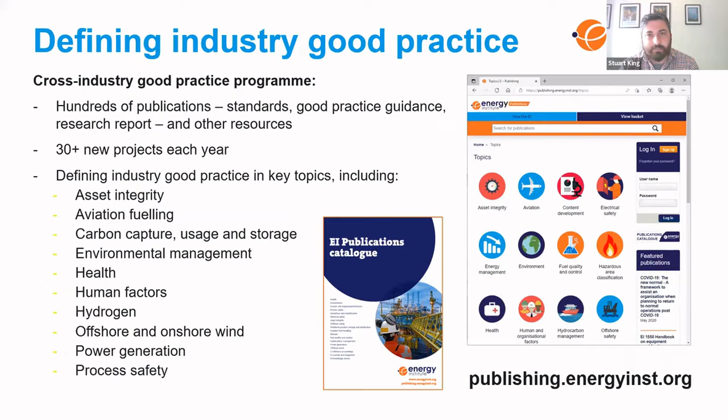So I'd like to introduce today's speakers. We've got 4 speakers lined up. Our first speaker is Nick Hough, a technical advisor for the International Marine Contractors Association. Amongst other things, Nick supports the IMCA Health, Safety, Security and Environment Committee and is responsible for all IMCA safety flashes and safety statistics. Nick is also responsible for supporting the development of safety promotional material and guidance.

Our second speaker is Utibe Akpanudo from Shell. Utibe is a lifting and hoisting subject matter expert with 18 years experience in lifting and hoisting operations in the oil and gas industry, including offshore and onshore, and is also a certified mobile crane and forklift truck operator.

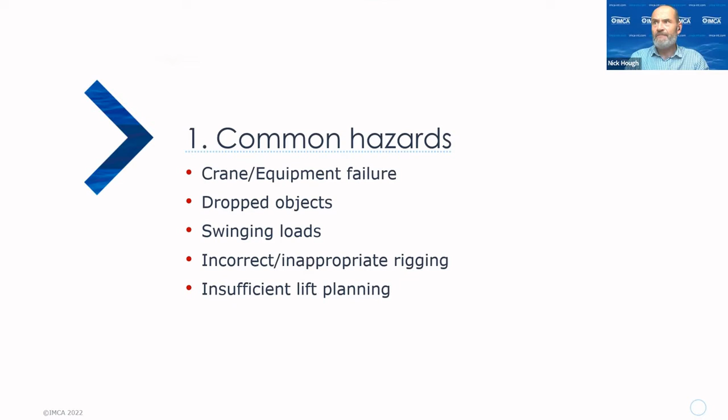Some common hazards then of lifting in the offshore context. When I looked into this, what I found is that it's quite a nuanced and blurred list, that's what I'll come back to a number of times. Just a minute while I set this stopwatch going so I know where I'm going. They all blur into one. So rather like the IOGP life-saving rules, any crane incident might be a crane equipment failure, it might be dropped objects, swinging loads might come about because of insufficient lift planning. There's a kind of blurring of what's going on that will come up again and again.

Let's look firstly then at equipment failure. Electrical faults are quite common there. When a crane's in constant use, it's inevitable that certain components are going to fail. Some of those failures might be sticking contacts, some might be earth faults, some might be electronic component failure as well. We had a safety flash about a year and a half ago from the HSE, where there was a fire in an electrical cabinet, and the problem there was that the contacts hadn't been properly and appropriately lubricated, and there was a fire. So sticking contacts could be an issue. Corrosion, I find certainly as one who collects safety flashes, is certainly an issue, especially in difficult to reach places.

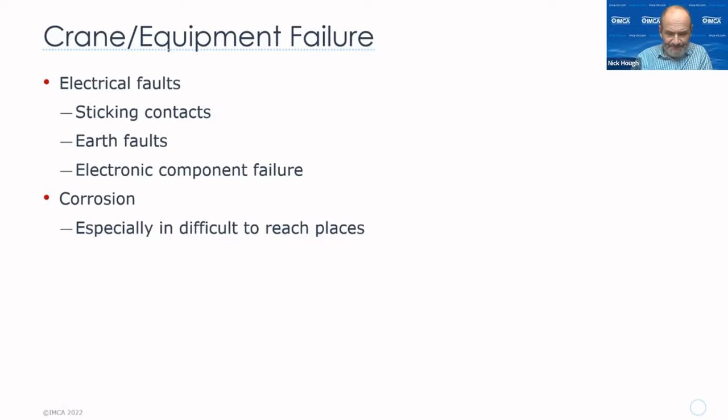If we look at dropped objects, Mark has provided for me an excellent list, 10 there, you can read them, 10 different causes of dropped objects in the context of cranes. And when I look through them, it's quite interesting. With almost all of them, there's perhaps only one or two exceptions, nearly all of them come down to human factors: inadequate risk assessment, failure perhaps to identify dropped object hazards, human factors, operator error, poor behavior, complacency or neglect, inadequate procedures, bad planning, poor housekeeping, neglected or homemade tools. All these things, with one or two only exceptions, they all come down to human factors. The HSSE Core Committee is looking very closely at a possible seminar in early 2023, and human factors and human performance will be one of the primary topics we look at.

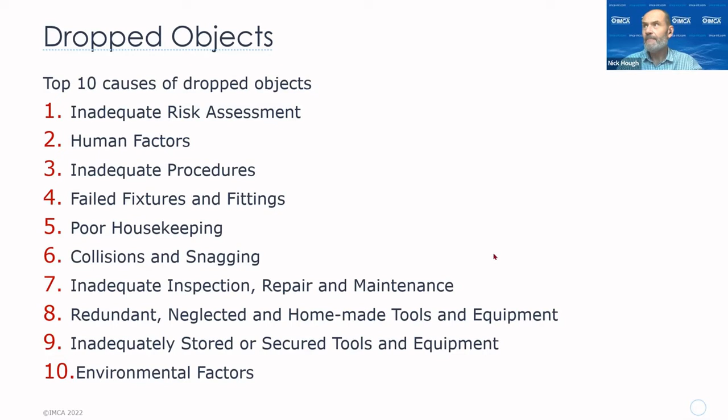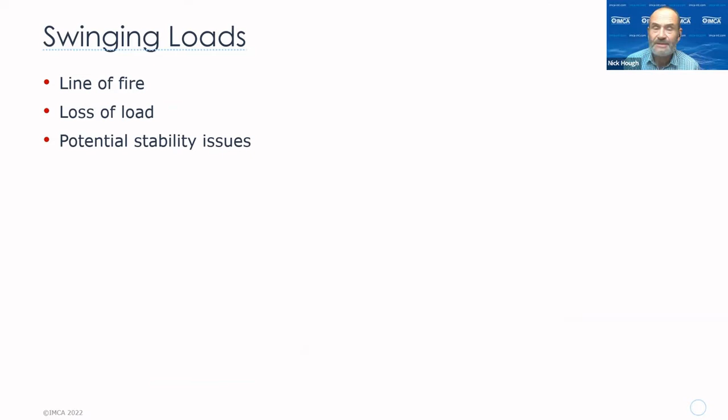If we drill down further, then swinging load. Now, swinging loads are dramatic, of course, but as we'll see later in the slide pack, not quite as common, although the consequences are quite outstanding, not quite as common as some of the other causes that we'll highlight today.

Even in calm seas, there'll always be some small or unsolicited movement of a suspended object. So in marginal conditions, you could easily get into a situation where objects start swinging in and out of control, and I think we've all seen it.

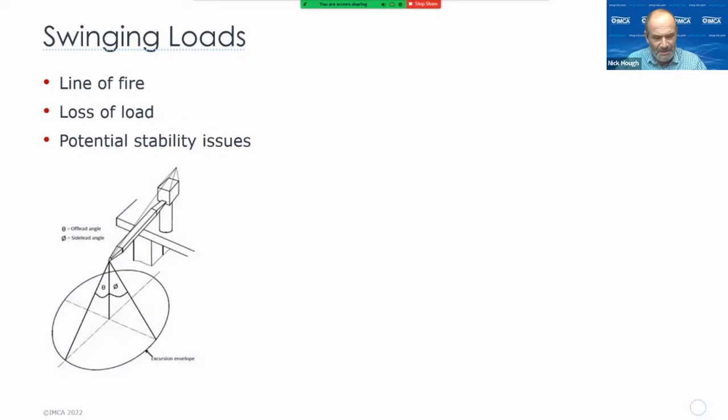Additionally, as you can see from the diagram at bottom left, you can get into a scenario where there'll be forces on the crane jib and on the crane, which it is not entirely designed for. Perhaps there'll be sidelead and also offlead.

But let's look at this. This is, if I can just play this. You have to decide when are you going to start running.

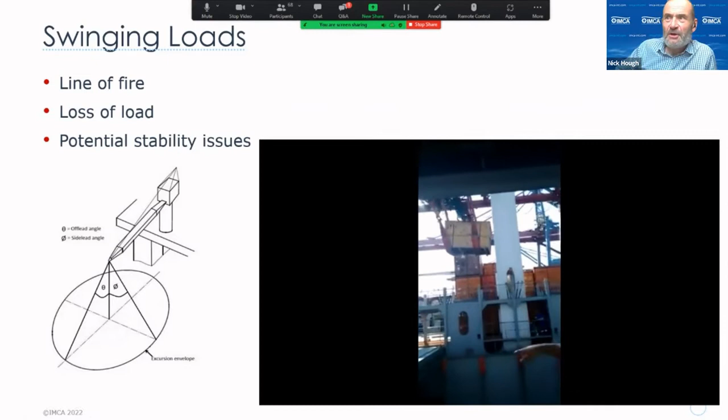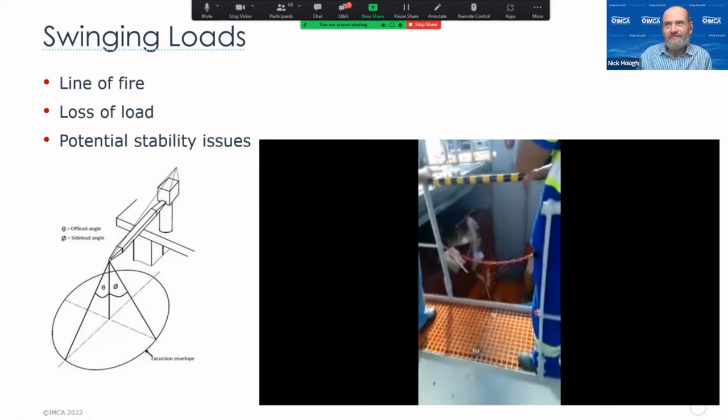I think that's all we need to see there.

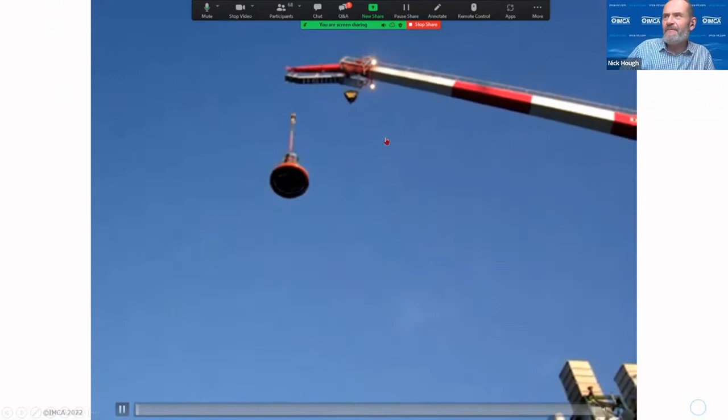The next video that's been provided from Mark's comment as well. I wouldn't like to see that happen.

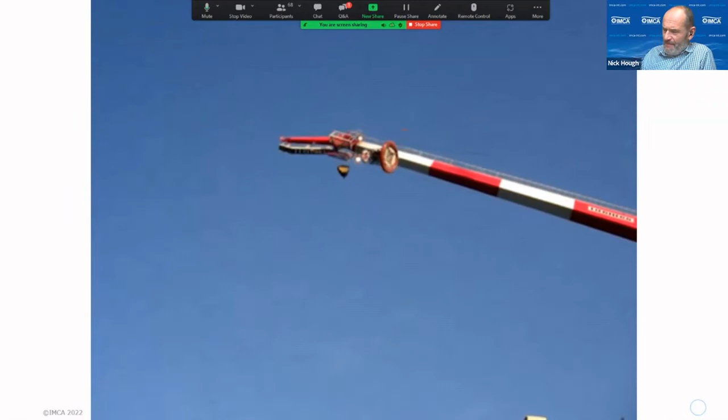While we're playing this video, moving loads in motion here and what have you. It depends on the weight of the load and the length or height of the crane jib. There can be some accidental loss of the crane hook, the crane hook failing, leading to a big heaving moment, and you can get a scenario where the load moves all of a sudden.

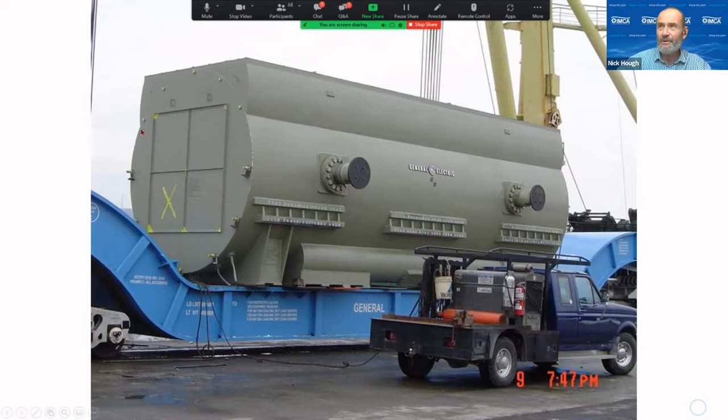We'll highlight that. Here's a generator, well, I think it's a generator, a large object about to be lifted onto a vessel. We get it rigged up, we pick it up, and we lift it across. No further comment needed, perhaps.

What about incorrect or inappropriate rigging? In order to lift the load properly, we need to know the weight of the load. That's the rigger's responsibility. The crane team really do need to have an absolute understanding. Most equipment that's regularly lifted may have the weight stamped on, but sometimes not.

There needs to be very regular, very thorough, and very frequent inspection of equipment. That's something we pick up in safety flashes and something we'll mention in a couple of slides' time.

The other scenario that can crop up, and I've certainly seen that when I've been offshore, is that the slings or the lifting equipment no longer have the appropriate labeling or tagging on. Such equipment ought not to be used.

Another thing I've certainly seen in safety flashes is homemade kit and inappropriately fabricated devices that have been modified in one way or another. That's not really on either.

Also, not using the correct sling device or hitch. Sling protection, we'll see that in a minute or two, where the sling hasn't been properly protected. And then there's the failure to understand the integrity of the load. That can also cause a number of problems.

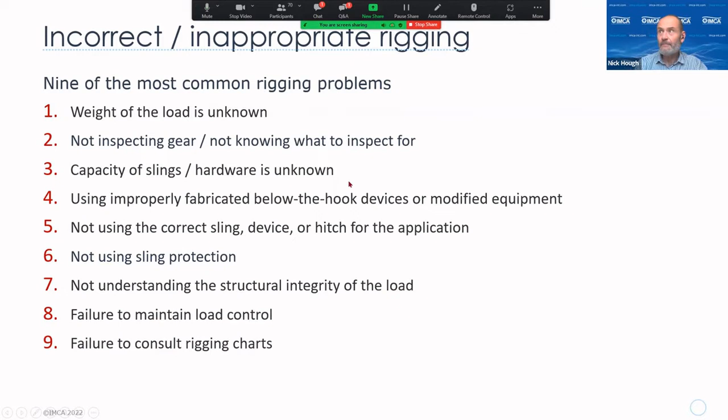Insufficient lift planning, categorization and considerations. There's a wide range of lift operations, inshore, offshore, subsea, and to say that they're all routine or all non-routine doesn't always work. What might be routine for one company because they do it all the time will be non-routine for another, involving extra and additional planning. So it's vital that we have appropriate categorization, and there needs to be an appropriate risk assessment made. Sometimes it needs to be specific and detailed, and sometimes a generic plan will work.

As regards lift plan considerations, all lifts are exposed to various dynamic effects due to differences in hoisting or lowering speed, crane or vessel motions, and load motions, and all that needs to be taken into account.

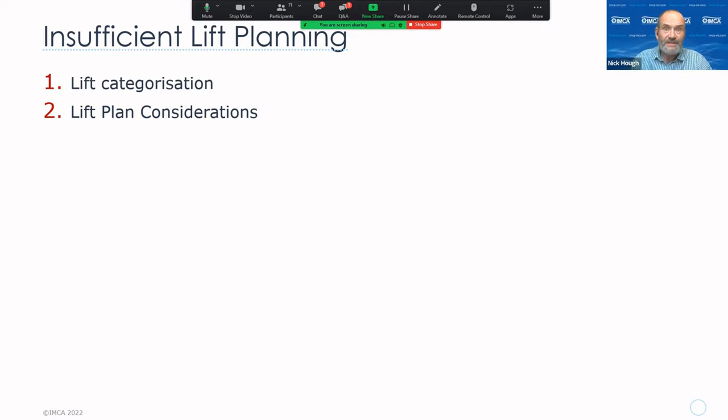Are we lifting from the shore to the vessel? Are we lifting from the vessel to the shore? Are we lifting inside a vessel? Are we lifting in different seas? Are we lifting from a platform to a vessel or a vessel to a platform? All of that needs to be taken into account.

It's been suggested that we look at a handful of real incidents, and that's what we'll do now for the next couple of minutes.

When I looked through all this, I'd selected something like 400 or 500 different safety flashes, all involving lifting. On a search of words, crane equipment failure formed around half of all the incidents I saw. Dropped objects, something like 40%, and swinging loads, just one or two. Incorrect or inappropriate rigging, around 5%, and about 10% was insufficient lift planning. But these all blur into one. One can lead to the other.

Let's look at 5 flashes in slightly more detail in turn.

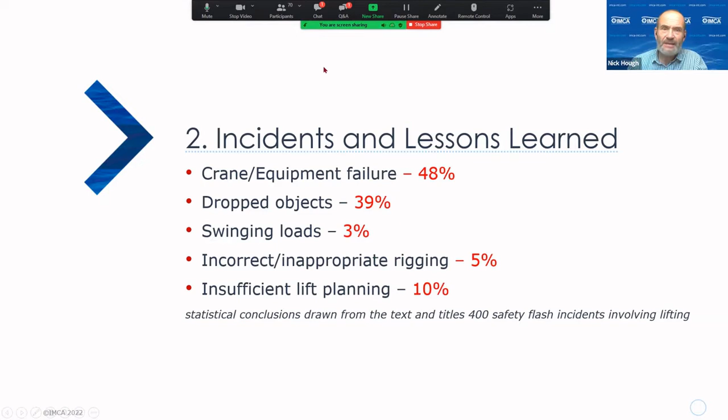Here we see a sling failed. 8 tons of ROV and tether management system fell 30 centimeters, bending the ROV quite badly. The whole 8 tons was directly slung onto the crane hook with a 10-ton fiber sling choked around the main lifting eye. The sling failed, choked around a sharp edge with no protection, and failed suddenly and completely. What were the actions taken? Better lift planning, better supervision, no improvised solutions, and better protection of any edges - not just sharp edges, but corners as well.

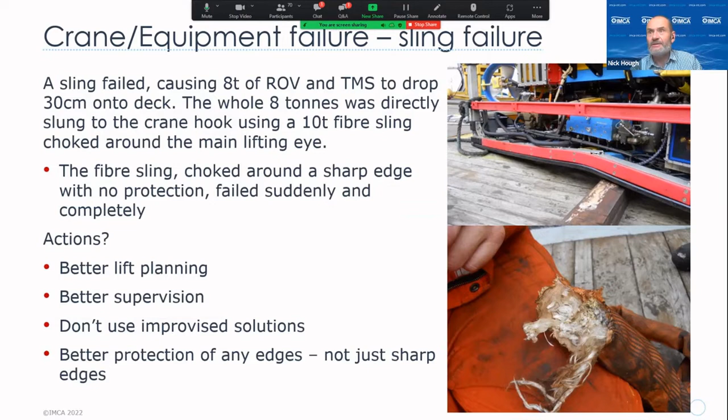This one is slightly more recent. A 9-kilogram item fell 15 meters from a pipelay tower - certainly would have been a fatality if it hit anybody. Parts were being changed out and put into baskets to be lowered out. One such basket started swaying, hit the crane, and a part fell out. The task was considered routine, so complacency may have played a part, along with sea conditions and darkness.

Perhaps it could have been better illuminated. Risk assessments were found to be inadequate, and the lock on the basket gate was also found to be inadequate. What were the lessons learned? They found that had they slewed the crane differently, it might have avoided the basket striking the crane. Covers and nets fitted on the basket might have helped. Also: thorough checks of all lifting appliances, don't overload, and better communication.

This is something I see again and again in safety flashes, and we'll see it in the next slide too - better communication, in this case between the crane operator and the banksman.

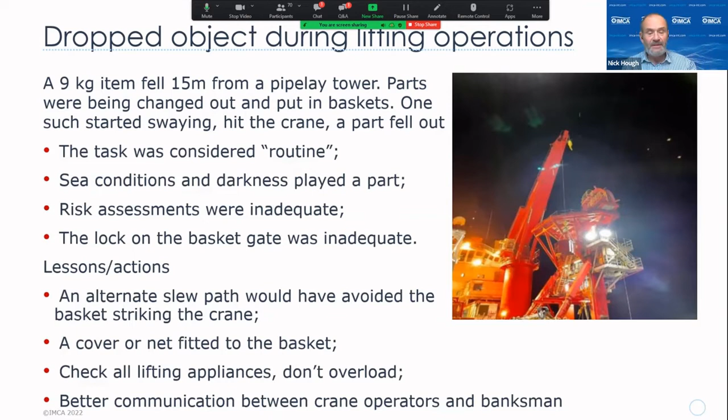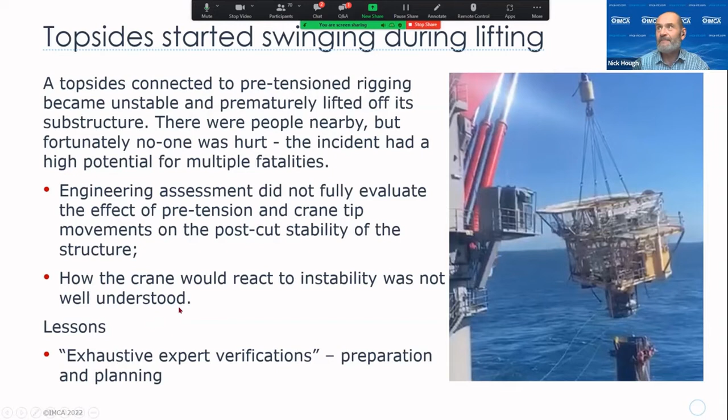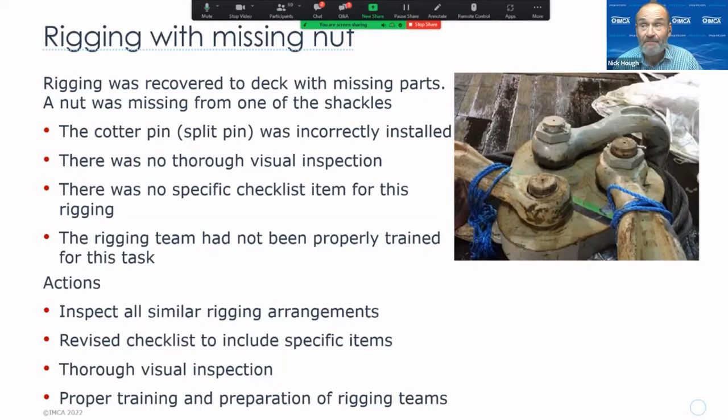Rigging not appropriate - here we saw rigging being recovered to deck with missing parts. A nut was missing from one of the shackles, the cotter pin was incorrectly installed, there was no thorough visual inspection, no specific checklist for that rigging, and the rigging team hadn't been properly trained. The actions taken were thorough and frequent inspection of all similar arrangements, a revised checklist to include specific items and thorough visual inspection, and proper training and preparation of the rigging team to ensure they're familiar with the material they're handling.

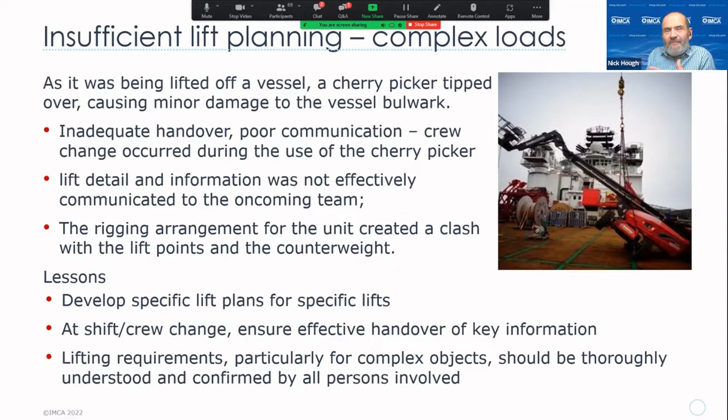The lessons there: specific lift plans for specific lifts, ensuring effective handover of key information at shift change, and the requirement that particularly for complex loads, everyone should understand what's going on.

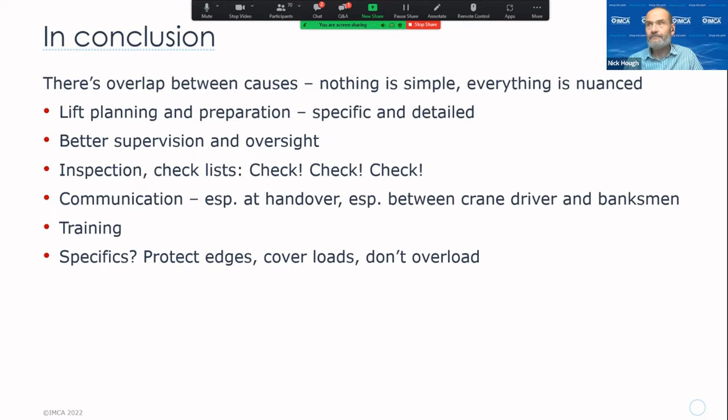And that, I think, ladies and gentlemen, will be it. So thank you very much.

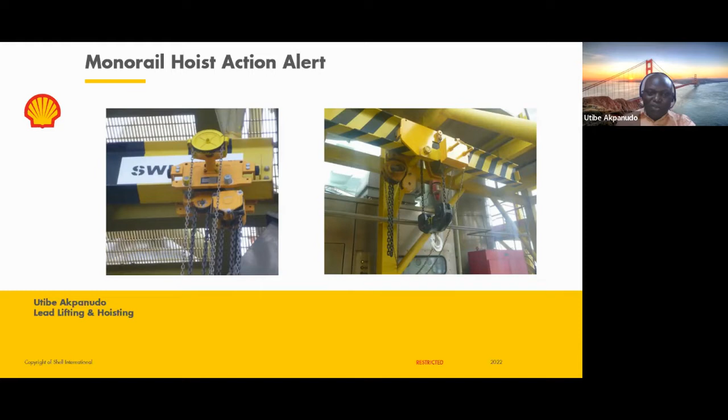So this is about the monorail hoist action alert, looking at a couple of learnings we had in Shell operations, which allowed us to put some mitigations in place to ensure that those incidents do not happen again. So the agenda for this discussion is going to look at introductions and the incident summary, and then action, and then an opportunity for questions and answers.

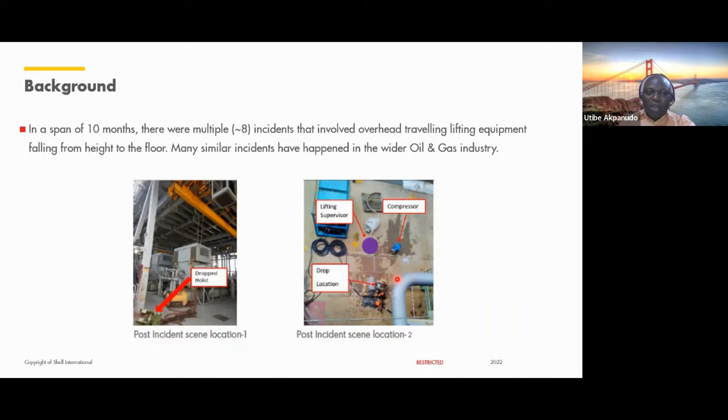So I'll go to my next slide to probably look at a typical scenario illustration of this monorail, and probably the end stops, which is one of the key discussion and learning points in this webinar.

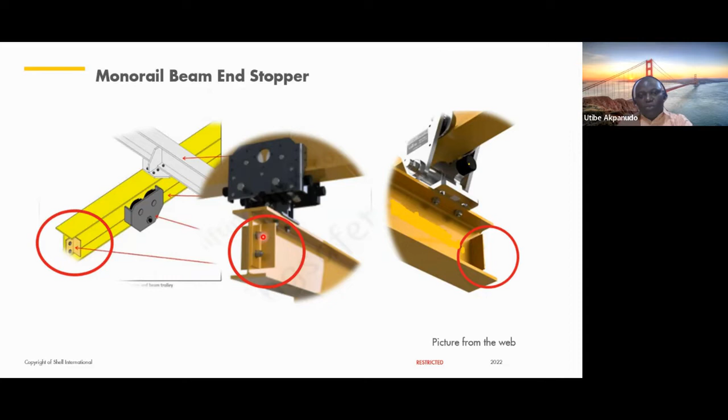So I'll go next to the other presentation for us to look at why it happened. Below are some of the causes we identified in the various incidents, and there were some common causes across the incidents. As I showed, not every cause was present in every of the incidents.

As I begin to look at the common causes, one of them was inadequate size end stopper on the monorail beam to prevent the trolley hoist from dislodging from the monorail beam. These were found in 4 of the 8 incidents, which represents about 50% of the incidents that happened within that span of 10 months.

We also noticed variations, absent or unsuitable pre-use inspection after installation of the lifting equipment at height, which in some cases posed a lot of challenge for folks out there, guys at the front line, accessing the height where they need to inspect this lifting equipment before use.

We also observed that there was quite a competence issue with the operator of this monorail and overhead traveling equipment. Competence in the sense that, irrespective of any piece of equipment, one is expected to undergo some competence training, to be able to understand the safety impact and HSE exposure of every equipment. So that was a gap that was noticed as well.

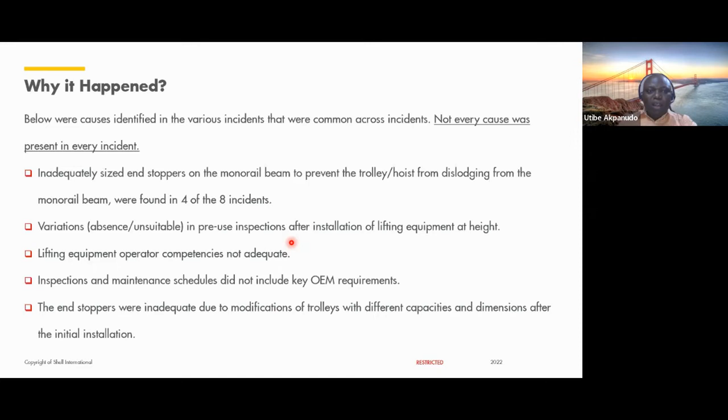Lifting equipment should be installed correctly according to the design and for its intended purpose. Every lifting equipment has a specific purpose it's been designed for. So installing it has to follow that design philosophy to be sure it's being maintained, operated, and stored in a safe manner.

Lesson learned also includes the pre-use inspection, which has to incorporate a functional test and a dry run. This is without load, and should be performed before every monorail, hoist, and trolley is used. What do we mean by this? Before you actually rig a load on the hook of the hoist, whether it's a manually operated or power-operated hoist, the operator needs to undergo a pre-use check: hoist it up, travel along the path, travel along the beam, check that everything is fine, and check all the load securing is in good condition before the operation can commence.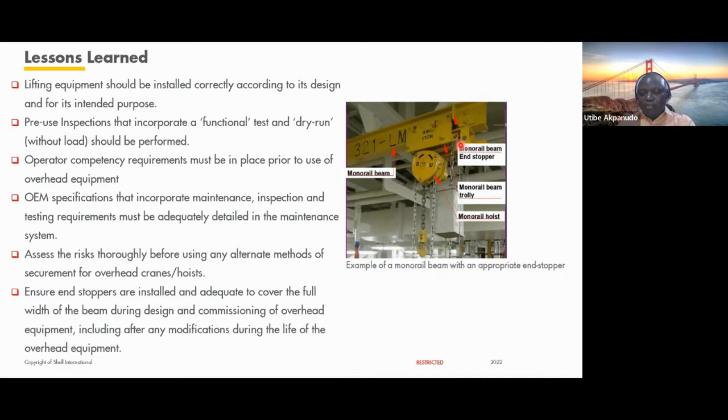Then some actions which can also be a best practice for the community and different assets to use. What we did was ensure that design and commissioning requirements are outlined in our lifting and hoisting guide. In a local procedure, you have to be sure this specification is indicated there as a control, that the end stop has to cover the full width. This is one of the best practices we implemented, which can help other communities ensure this by design. We don't give any room for error.

Then the second action was to identify and address existing overhead equipment. What we have to do is inspect the existing overhead lifting equipment, identify those where the stopper does not cover the full width of the beam. You can put it down in a register, then undergo a formal process to ensure a redesign of the end stopper is done to cover the full width of the beam.

We also, as an action, confirm that overhead equipment has sufficient and appropriate securement to prevent the lifting equipment from falling. The securement there is the whole traveling hoist system. You have to do a sweep and be sure it has been secured to the beam or structure keeping it in position, and that structure is robust enough to withstand the impact of the hoist and the load.

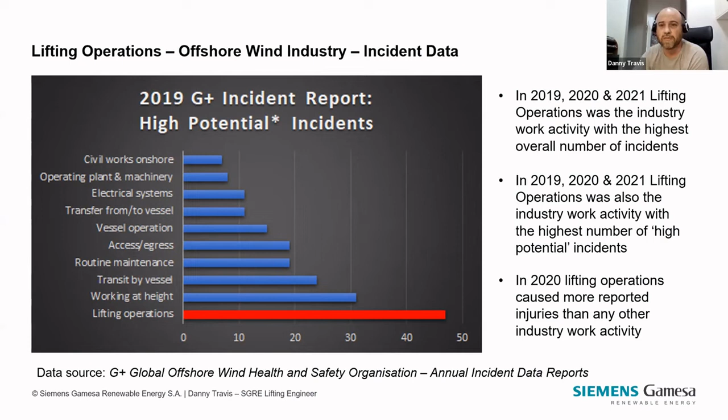Just to give everybody some background, I work in the offshore wind industry. We have a safety organization called the G+, run by the Energy Institute, that publishes annual incident data. Somewhat concerningly, for the last 3 years in a row, lifting operations has been the work activity with the highest number of overall incidents and the highest number of high potential incidents. The G+ defines a high potential incident as any incident that had the potential to cause fatality or life-changing injury.

So as you can see, within the offshore wind industry, lifting operations is getting a massive amount of focus at the moment in terms of how we manage that risk more effectively. My presentation looks at some of the steps that Siemens Gamesa Renewable Energy have taken to do that. It's representative of lifting operations as a whole, but I've chosen a particular incident to construct the presentation around, so please bear with me.

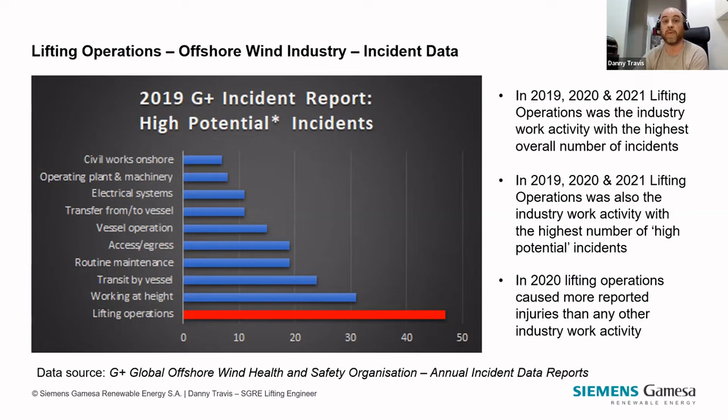Industry trends with lifting operations: a significant number of these lifting operations occur during really low complexity operations and maintenance activities. I think the incident data released yesterday for 2021 shows about 53% of all incidents are happening during really low complexity operations and maintenance lifting operations.

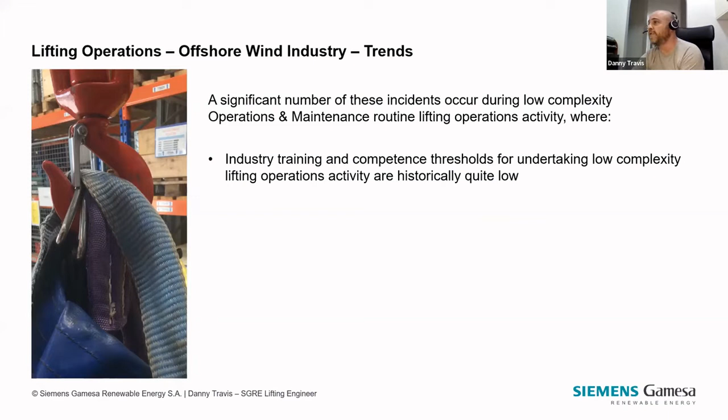Industry training and competence thresholds have been historically quite low for slinger signalers, crane operators, etc. Standards of lift planning are generally quite poor in this area of industry, and in some cases entirely absent. There's a very common use of generic risk assessments, which in some instances are used in place of lift plans and safe systems of work. Deviations from prescribed lifting methods are very common, and as Nick mentioned before, there's quite often poor procurement, selection and use of appropriate lifting accessories.

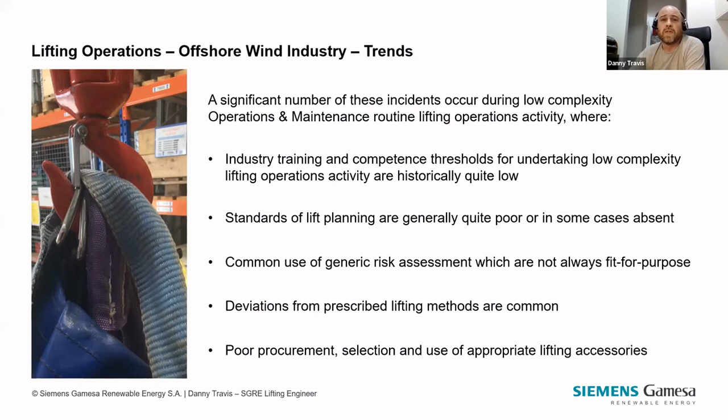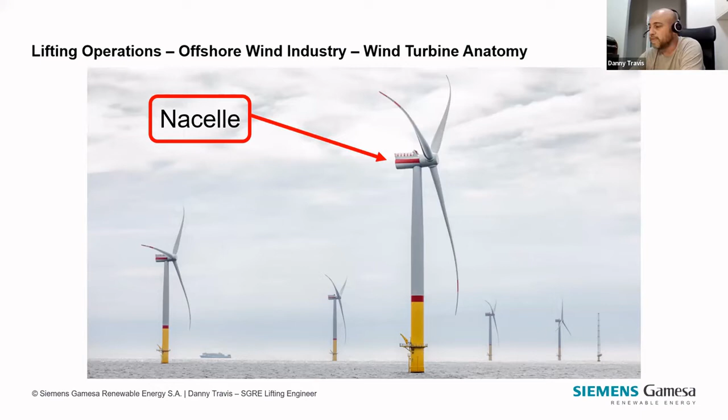I've put a slide together to show you the anatomy of a turbine, so I'm not using terminology anybody's unfamiliar with. The basic makeup of our turbines: you've got the nacelle at the top, where all the mechanical and electronic workings are, the rotor, the tower, and the transition piece. For this presentation, it largely involves lifting tools, equipment, materials and consumables from the transition piece up to the nacelle or back down again, depending on which way we're operating.

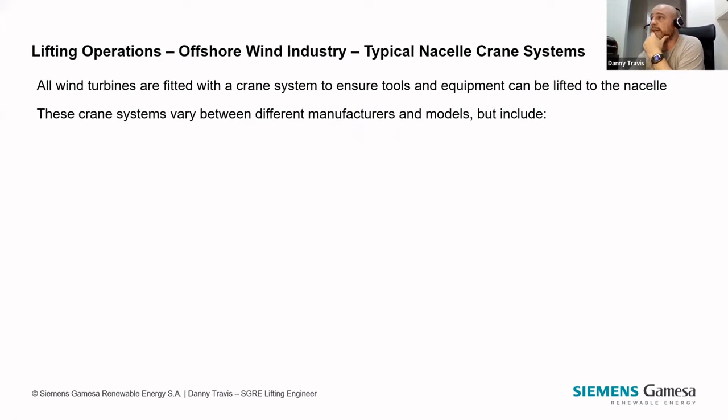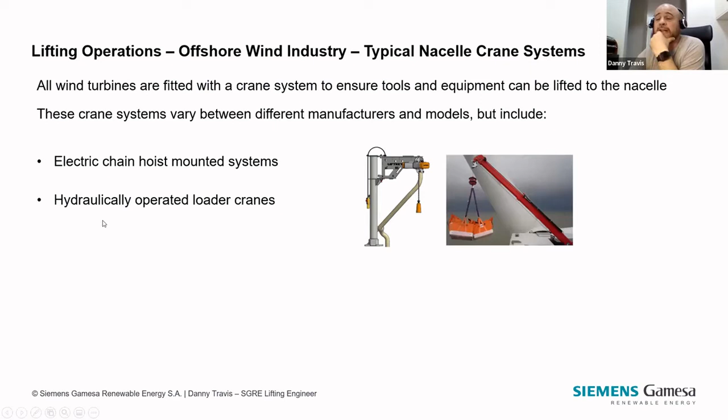Almost every wind turbine constructed these days is fitted with some kind of crane system to ensure tools and equipment can be hoisted up so we can service and repair them. These crane systems vary between manufacturers and models, including electric mounted chain hoist systems, hydraulically operated loader cranes, rail or runway beam mounted hoists or winches, and a few other variations. They differ significantly, and they tend to be an afterthought to the design of the turbine - the turbine itself is designed, and then we wonder how we can get tools and equipment up. So quite often you get what you're given.

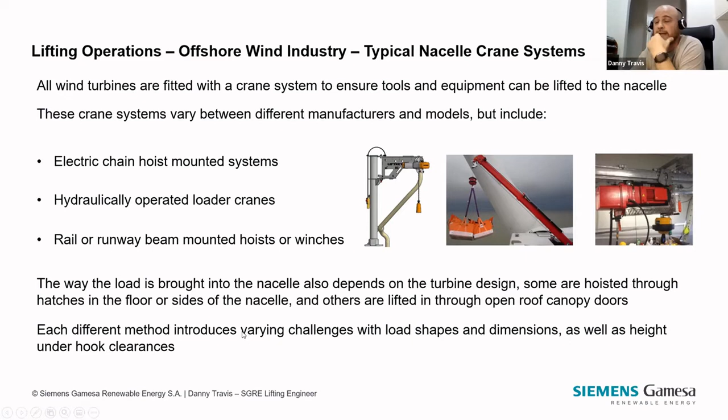The way a load is brought into the nacelle depends on the turbine design. Sometimes loads can be hoisted through hatches in the floor, sometimes through hatches in the side of the nacelle, and in other occasions they're lifted in through the roof, through open canopy doors. Each different method introduces different challenges in terms of the sizes of load, shapes, dimensions, etc., and also height under hook clearances, which is prevalent in the incident we're going to talk about here.

So in 2020, at one of our sites in Germany, we had a lifting bag that was dropped. A lot of our tools and equipment go up in these certified lifting bags, manufactured for the offshore industry, relatively bespoke to some of the jobs we do, but most of our tools and equipment goes up to the turbines in these bags. In 2020, we dropped one of these in Germany. Now, as I've said, this presentation is based on an incident, but dropped bags within this lifting industry has been endemic - it's happened a lot, so this is representative of the wider industry.

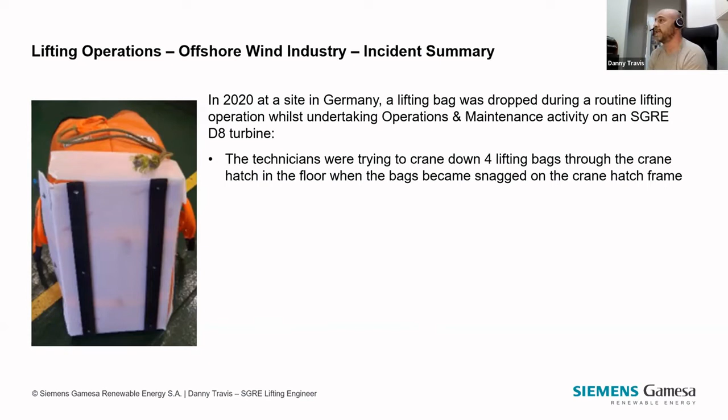A little bit of background: technicians were trying to crane down 4 lifting bags simultaneously through the crane hatch in the floor. So this is a turbine with a hatch in the bottom.

When the bags were freed, they got snagged on the frame. When the bags were freed, one of the bags became detached from the 4-leg sling. That resulted in the load falling 95 meters down to the transition piece at the bottom of the turbine, where it hit an access gate and came to rest on the transition piece.

These lifting bags, it depends on what they have in them. They can range in weight from 25 kilos, probably up to 300 kilos. So it goes without saying that a fall from that height, if it had struck someone, would have undoubtedly been a fatality. The access gate and its hinges were damaged, and the equipment inside the bag was totally destroyed, which stands to reason.

Fortunately, nobody was actually working on the transition piece at the time, so there were no injuries. And again, historically, that's been the case when this has happened before. So you could say that we've been incredibly lucky.

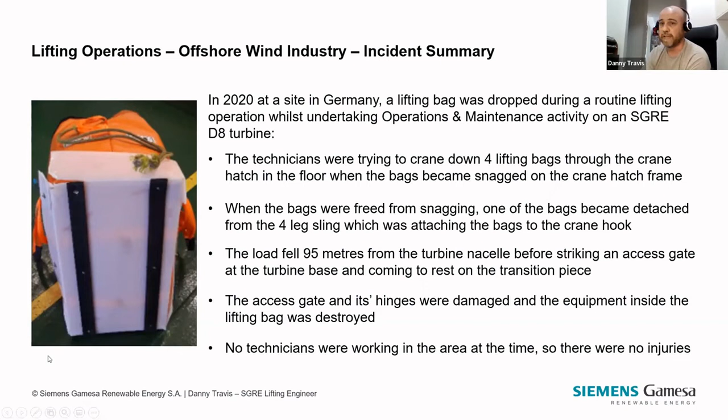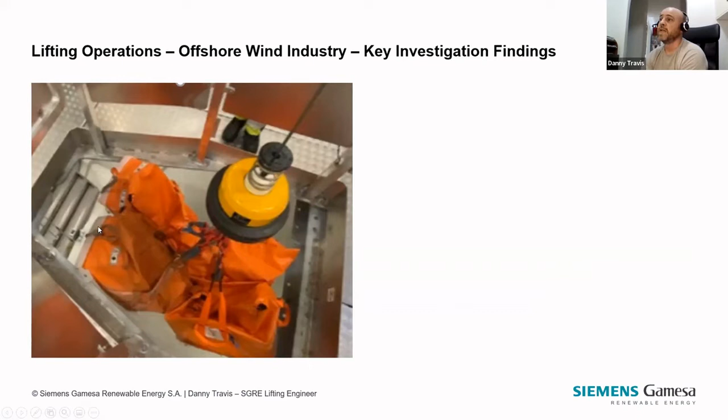So this is a recreation of the incident. The photograph's not great because I've had to zoom it up for the presentation, but as you can see, there's 1, 2, 3, 4 lifting bags, and they're trying to lower them down through this hatch here.

As you can see, they've got snagged at this end and snagged at the other end. So the 4 bags lifted together simultaneously were too big to fit through the crane hatch without snagging. Bags were known to snag quite regularly. It wasn't uncommon, and you can actually see an individual's foot here, wasn't uncommon for a technician to maybe stick his foot through and push them through the hatch.

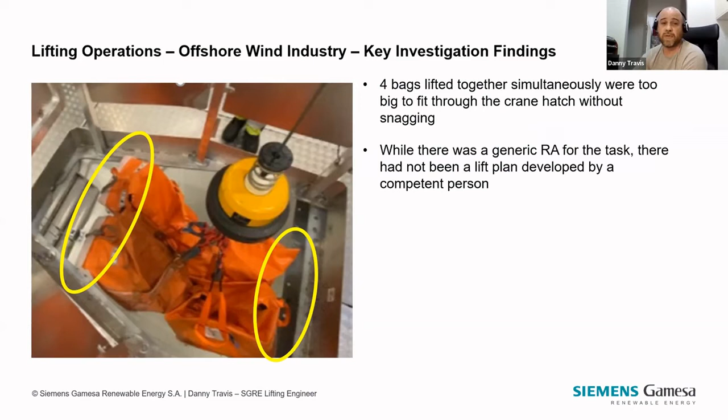Whilst there was a generic risk assessment for the task, there hadn't been a lift plan developed by a competent person, an appointed person or lift planner. So it was just being done under a generic risk assessment.

The 4-leg accessory used to attach the bag wasn't actually suitable for the crane type we were using here. So the sling leg length was too long. You perhaps can't see it on the photograph, but the actual sling had been passed through the bag handles and doubled up in a cradle hitch, if you like, back up to the crane hook.

When we actually read through the instructions for use of the sling during the incident investigation, that was actually prohibited. They shouldn't have been used in that way. But they were poorly specified because obviously they were too long.

But they had to be doubled back because when lifting into these turbines, this is a roof-mounted nacelle crane, so there are height under hook issues. The overall load height, including rigging, has to be below 1.35 meters. And if it's above that, you can't get it safely into the turbine. So the reason they'd been doubled up was because they'd been poorly specified, couldn't get the bags in, hence why they were being used in that way.

And it was just common to have been done on this site. Although no one was working on the transition piece at the time the bag was dropped, because there wasn't a lift plan in place, because there wasn't a safe system of work for this, there wasn't actually a requirement for there to be any kind of exclusion zone. So the fact that nobody got injured or hurt was luck and not judgment, if you like.

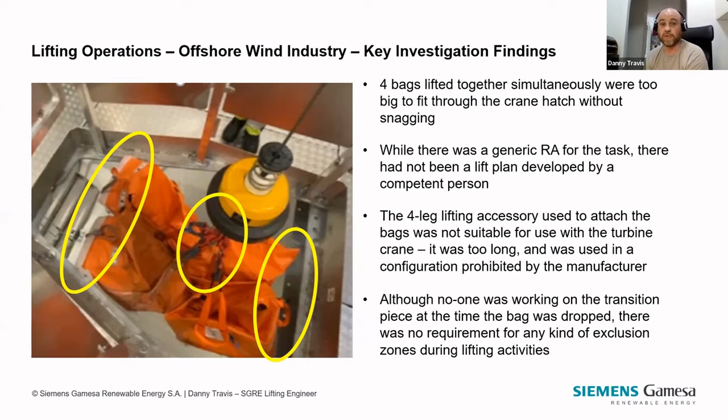So some of the lessons that have been learned from this incident and from an array of these types of incidents happening across the industry: at other SGRE locations, lift plans already existed for lifting into the D8 platform.

One of the nuances with doing lifting operations in the renewable industry is the equipment's common, a bit like car manufacturers. Car manufacturers might make 5 or 6 different models of car, and we're pretty much the same. So to some degree, it doesn't matter where you put a wind turbine. It could be in Germany, the UK, Belgium or the Netherlands. The actual equipment, the internal workings, the gubbins, the crane, etc., they're all the same.

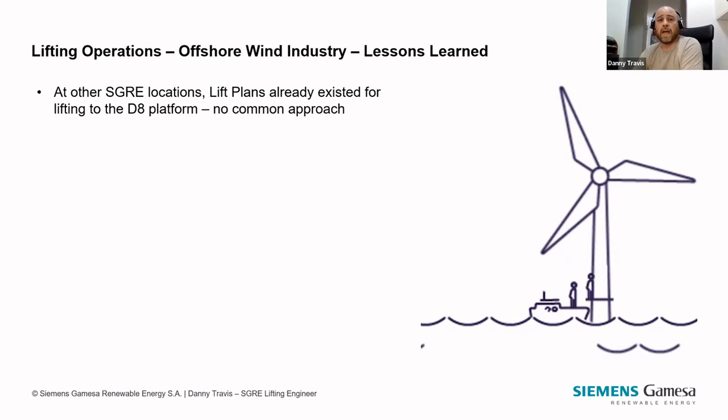So at other locations, we actually already had lift plans in place for this D8 platform. Interestingly, where we did have lift plans in place, they had already developed bespoke lifting accessories for this platform, designed with the platform in mind. So they were the correct length, so they didn't have to be doubled back up. They could lift bags correctly by attaching the hooks to the bags. And it was a 3-leg sling, not a 4-leg sling, so by removing a leg from the sling arrangement, it wasn't actually possible to lift 4 bags.

Therefore, you're eliminating the problem. If you can't lift 4 bags, then you can't have the same incident. So it was already known at other sites that lifting 4 bags was problematic, and sites had already taken steps to prevent this. This is one of the things we've found quite often with lifting incidents, some sites will say, oh, we're aware of this. We've already designed a piece of equipment for this, or we've stopped doing that, or we've got a checklist to check for this.

In terms of lessons learned, one of the things we weren't great at a couple of years ago is actually joining up the dots and making sure lessons learned are applied everywhere, not just at one location, one site, or within one country or region that I look after lifting operations for.

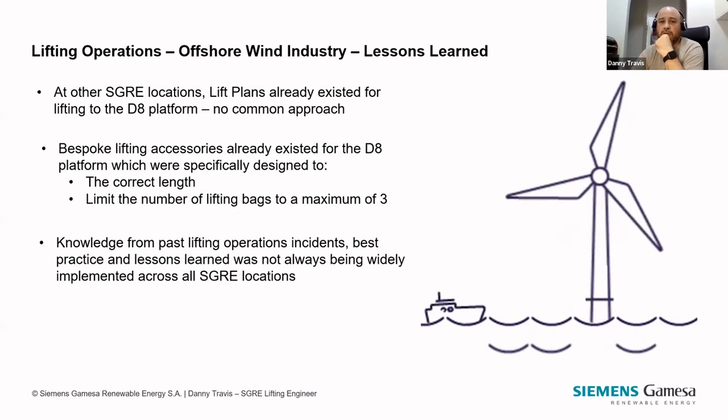Despite maintaining several thousand turbines across approximately 30 sites in Northern Europe, the crane technology and its uses is common across only a small handful of platforms, which leads on to where we're going with solutions and what was implemented afterwards.

We went down the route wherever we could of standardization. Lift plans now for service O&M activities are centrally owned and developed for the whole region by competent lift planners. So we literally have a lift plan for each of the different platforms we have. The idea is if you're working in the Netherlands, Germany, Belgium, or the UK, if you're on the same equipment type with the same crane, you are working in the same method.

So we've entirely standardized it. We've taken the best bits of what sites have developed in terms of equipment, slinging arrangements, lifting bags, etc., and brought that together under one lift plan. So with a handful of lift plans, we've standardized the processes.

One of the benefits is if we have a safety or quality issue with one of our cranes or lifting operations, we can incorporate that into our safe system of work. The safe systems of work are all managed digitally. Our technicians have access to them through a system called Fluix. So if we make a change to a lift plan with a safety concern, it goes out to the whole fleet, and when technicians access this documentation on Fluix, it's being updated automatically to the newest version all the time.

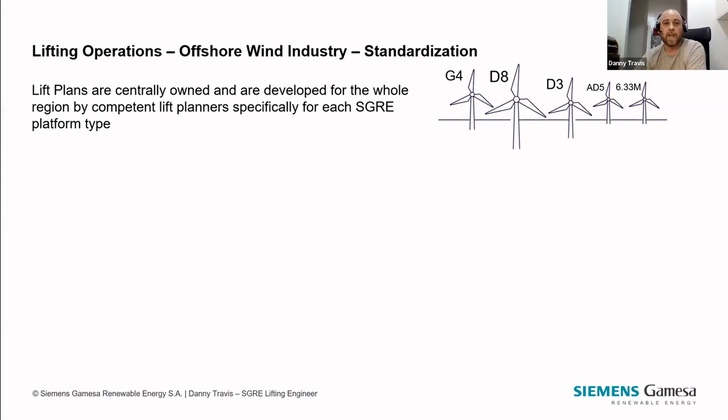So we can effectively share lessons learned and improvements made to the safe system of work across the whole region instantly, near enough.

We've also gone through mass standardization of lifting accessories and lifting bags. So we're taking this one step on now. Equipment's being designed specifically for the different limitations that we have with the different platforms.

And we're actually starting to take that one step further. Rather than just simply designing equipment for each turbine type, we're looking to optimize it, so we can reduce the number of lifting operations we do. Obviously the fewer lifting operations we do, the fewer people we put at risk. It's that straightforward. So a massive piece of work undergone in terms of standardizing what we do.

Lift plans now define prescribed methods for securely attaching all loads, which is something we didn't have before. The rigging arrangement, how a load was attached to the crane with a generic risk assessment, just didn't exist.

The number of component parts for a turbine is finite. There are only so many different parts in a turbine. So we've been able to effectively map out all the lifting operations undertaken on any of our turbines and develop individual load cases for everything. Anything that's not in a lifting bag has its own dedicated load case where a competent appointed person will plan how that's lifted.

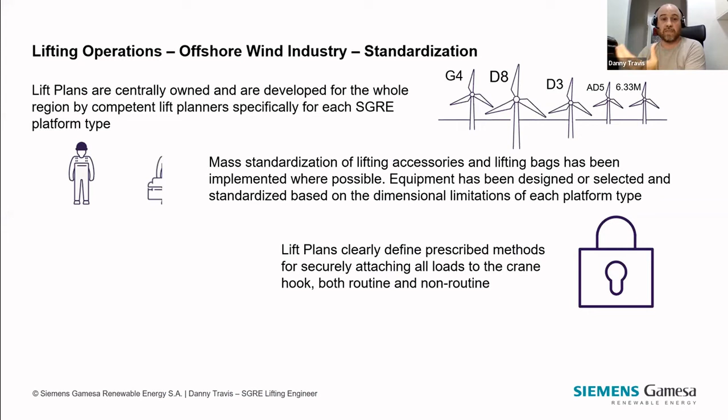Again, that's stored in a library that the whole region has access to. So if you have a non-standard load, we'll have a dedicated rigging arrangement for that. And if we don't have one, we'll develop one, which is how the system works.

Also, just to come full circle in terms of the incident in Germany, wherever we've got lift plans in place on all offshore wind turbine transition pieces now, we have mandatory exclusion zones during lifting operations as soon as the load is above head height. So you're expected to retreat off the transition piece and into the base of the tower. There's a doorway in the base of the tower, and if need be, you can still observe.

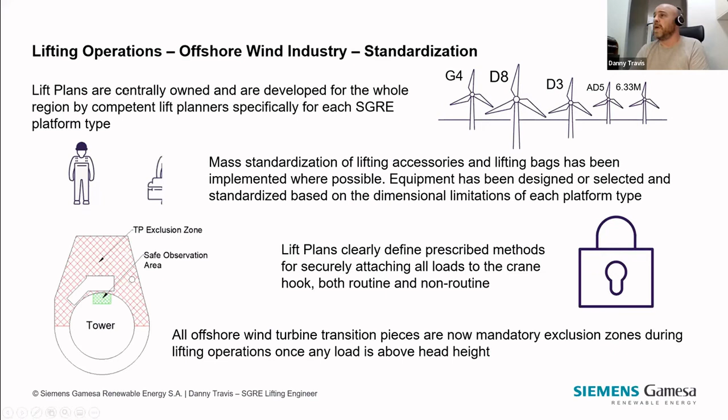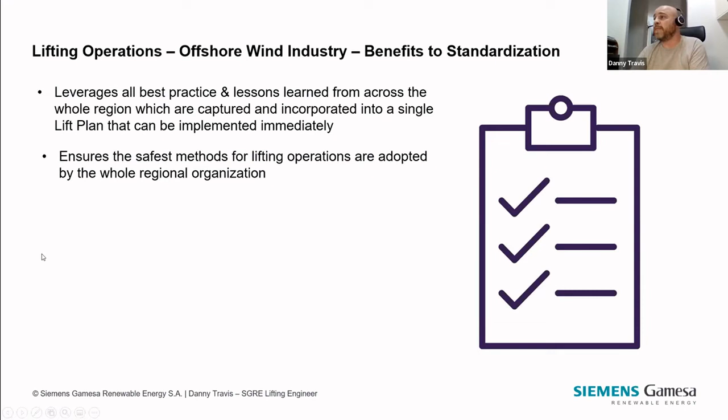So some of the key benefits to standardization then. It leverages all the best practice and lessons learned across the whole region. They're captured and incorporated into a single lift plan. It ensures that the safest methods for lifting operations are adopted by the whole region because we then mandate them into the standardized lift plan.

A small team of competent lift planners can manage a huge workload. So effectively, using this system, we have 3 appointed persons that manage the lifting operations across, well, we estimate it to be just over 3,000 lifting appliances, just through using standardization.

It eliminates the mass need for repetition of the same work at site level, and it reduces any divergence, which is very common when it's handled at site level. The optimization of lifting accessories and lifting bags has resulted in improved productivity and improved safety because we're carrying out less lifting operations wherever we can.

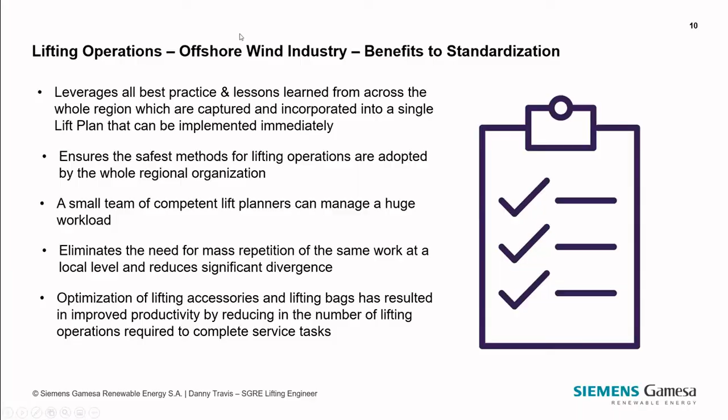It's been interesting so far, and hopefully I can capture everything, particularly around the themes of dropped object prevention and some of the lessons that we've all learned as an industry, and how we've shaped that into a resource of best practice. So I've got a few slides like everybody else, I like the high visual kind of content. Representing such an important initiative, particularly DROPS, has been an absolute pleasure, to be able to stand here and talk to you on behalf of DROPS.

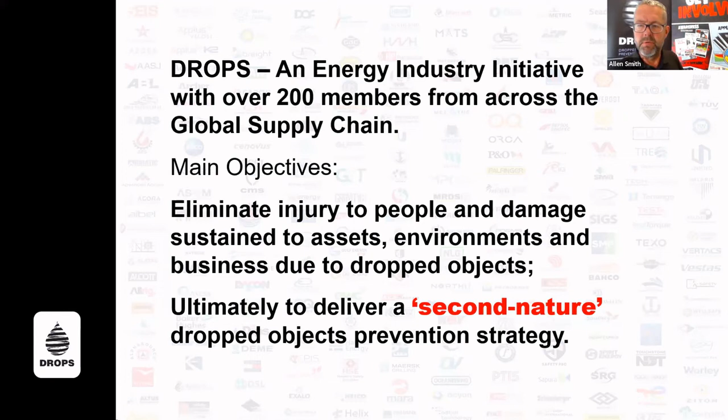I'm really talking on behalf of everybody that has supported DROPS. All of these industries are all doing the same thing: 100% focus on dropped object prevention. I know we're across the energy sector, but there are many more besides. We've got everybody from fastenings right the way through to the oil companies as well. What we're trying to achieve here is a second nature dropped object prevention strategy, something we can all easily refer to — the underlying principles, some common practices, without it being too complicated.

We're just rewinding and thinking, well, the common theme here is what have we learned? We've all learned, hey, dropped objects, in particular during lifting, they can harm, they have harmed, they can kill, and they have killed. So there we are.

What have I learned from some of the data we've received? Quite an interesting presentation we were working on a couple of years ago was: where do you commonly think these dropped objects come from? And based on the injuries, it's a good question to ask — where do you think you're going to be struck by a dropped object during lifting activities? Almost everybody thinks you're going to be hit on the head.

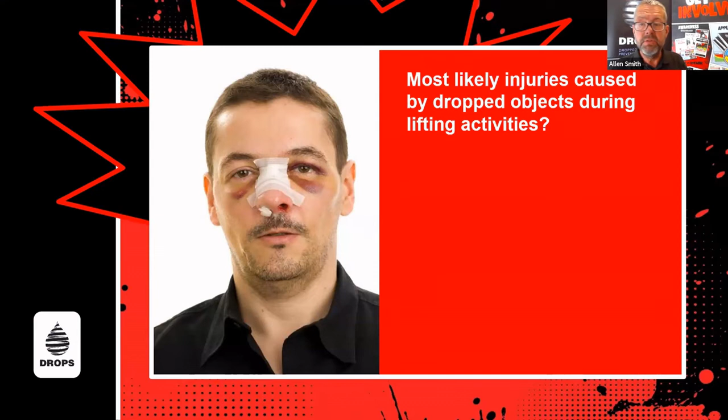Already today we've seen that dropped objects can fall from any height. But from the point of view of what we're exposed to, or the cone of exposure, the significant injuries to hands and feet and arms and extremities, the significant injuries as a result of deflections while loading cargo, as well as things that do hit you on the head. I thought that was a fascinating subject — where do dropped objects come from? Are they always above our heads? Are they always involved in just the lift or just the cargo?

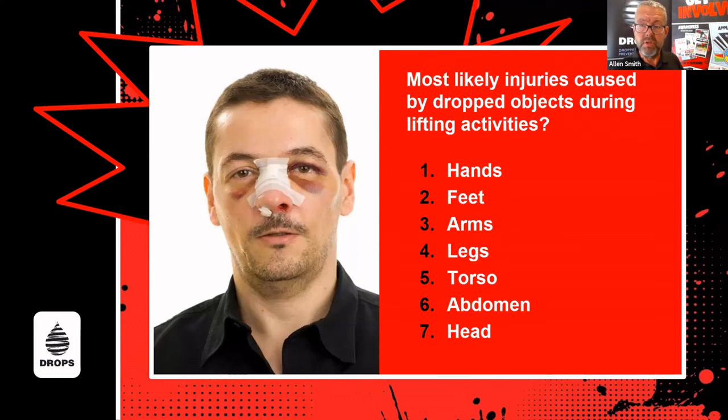Actually, when we start to study all of these incidents, you can see dropped objects that cause — well, that's something we can look at, but the consequences are typically the lessons we're learning: the equipment damage as a result of dropped objects, the asset damage, the environmental damage, and the potential for damage to our reputation too. Drops necessarily isn't just a safety initiative — there's an opportunity here to start thinking about the integrity of our equipment and the integrity of our operations too.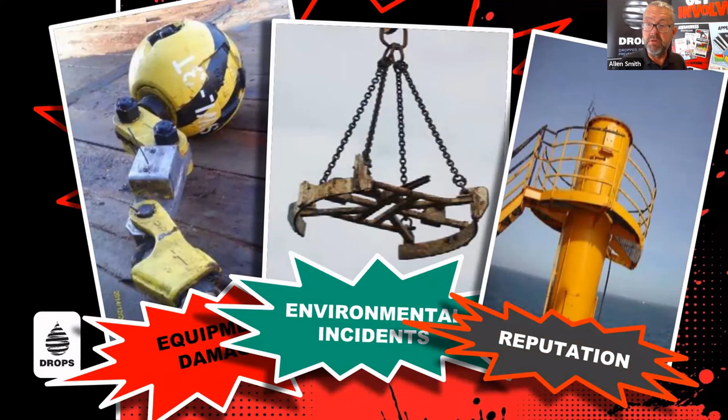Again, from the exposure point of view, it's not always just the cargo. This is an old incident, but a great slideshow that's part of the packs you can get from DROPS, freely downloadable because they've been shared by others. We can see somebody got real lucky here, but it's a load that hasn't been secured during loading. It seems to be a common theme.

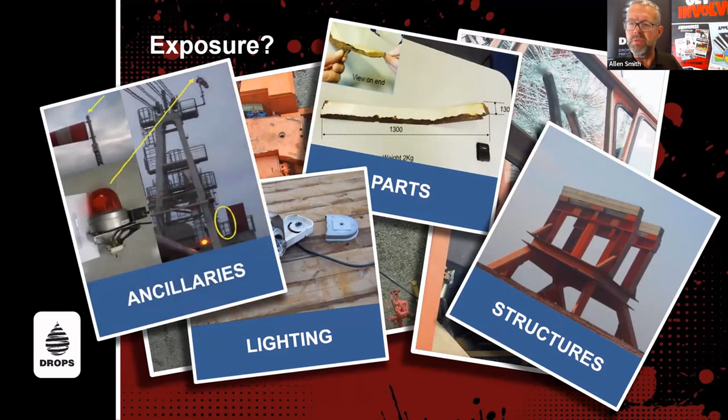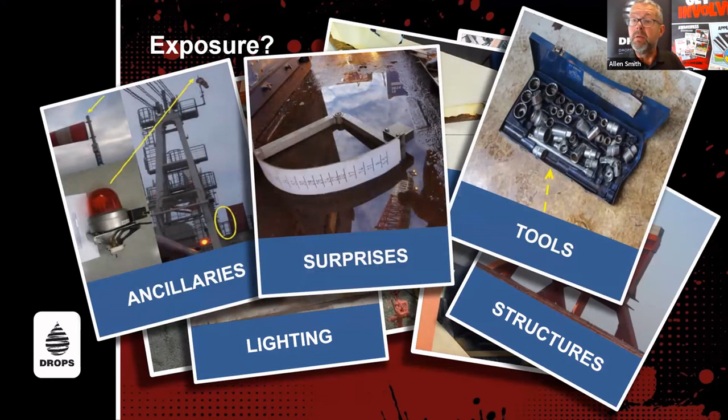But then what about everything else? Well, there's crane parts, there's the structures we use in lifting. Crane boom rests, the lights swinging around on cranes, all of these have become dropped objects. The ancillary items, the tools we use to repair cranes, the maintenance tasks. We've even got the occasional surprise - could even be lumps of grease falling from the cranes, and even nuts, bolts, and screws.

And from significant heights, when you start to look at the science behind these, you can then start to really appreciate that there's a whole broad range of dropped object potentials, and even the nuts and bolts can have severe consequences. So what can we do about it?

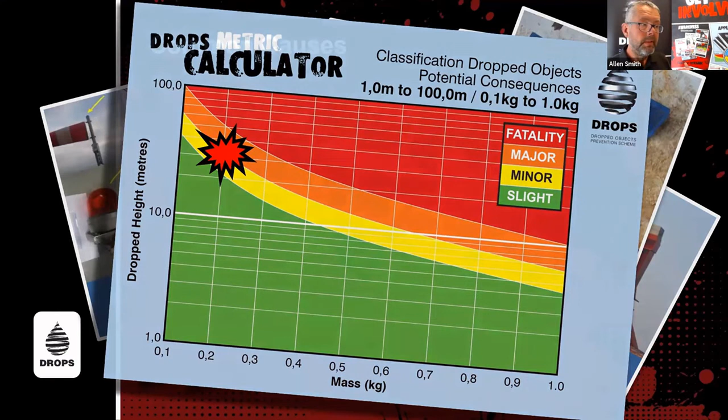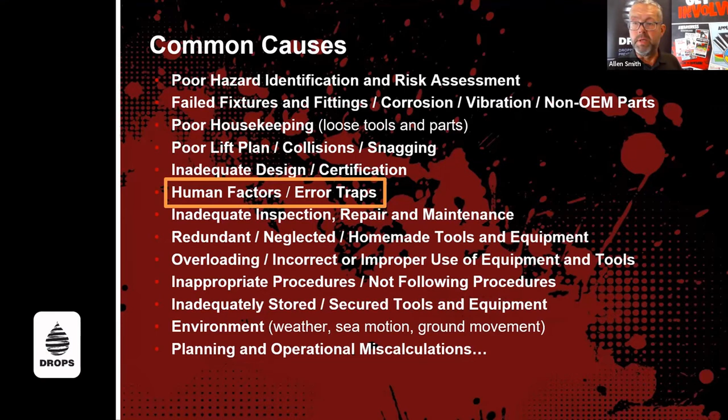Well, again, you've seen this list of common causes in a previous show, and it's great that through sharing we're able to provide these lists, but make sure we use them, because these are the ones that trigger the thought process in the risk assessment. There's many to consider here, but the one I think is a common theme we're all discussing at the moment is the human factors or the error traps. There are so many resources out there which have captured all of our learnings in these areas, but I think human factors and error traps are certainly worth focusing on.

Through organizations such as IOGP, I'm making reference to a specific publication here again, which is free, specifically focusing on lifting and hoisting recommended practice. It's captured all these shared best practices and the safe lifting principles. It's also considered the management system elements so that it becomes part of the management process. And of course, there are plenty of checklists and templates we can use too, many of which have been discussed in the previous presentations.

The classifications of lifts, the lift plan guidance. There's plenty of golden rules and things like color coding, all of these have come together to make a suite of best practice when it comes to lifting. But again, when you introduce the concept of human factors or human performance, or the error traps, there are many other resources to look at, including on the toolbox too. There's so many good resources that help us think about the potential for adaptation, the potential that perhaps generic lift plans are probably error traps if you think about it like that.

But all of these are still generic tools, particularly in my mind, because when it comes to dropped objects, we've got to be specific. Dropped objects, particularly as a result of the unplanned or inadvertent release of gravity, that's something we really can't isolate from the work site. Gravity is a constant - it's something we have to prevent its release. So when it comes to dropped object prevention, we've got to be specific. We've got to focus on what those potential dropped objects are.

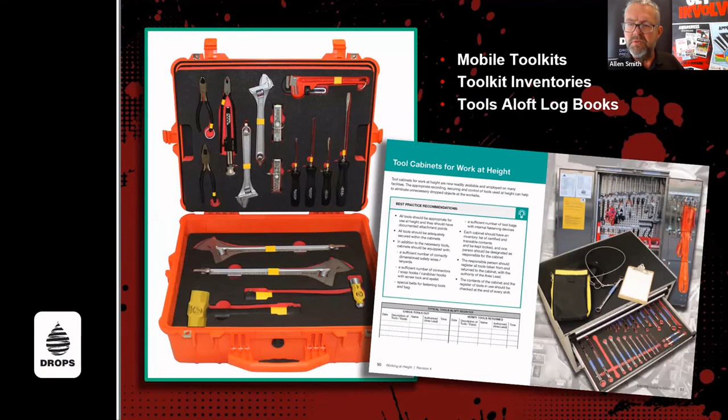So there are lots of products available when it comes to tools, but it's interesting when you look at these and you look at how they've developed over time through working with the DROPS community, that we can have specific toolkits for specific applications, toolkits that belong to cranes, toolkits that belong to task-specific activities.

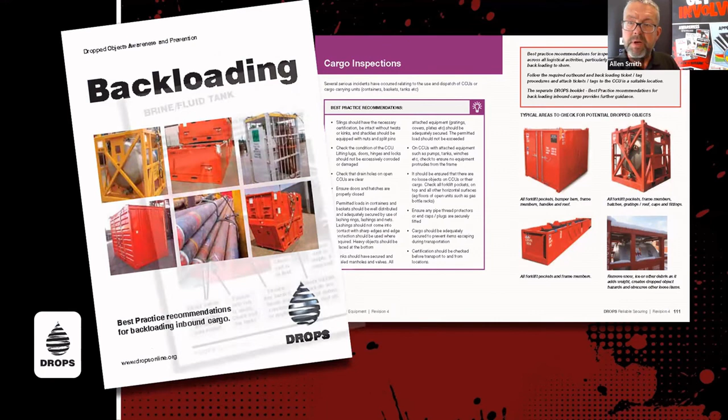And there's also the cargo itself, the inspections of cargo. Within reliable securing, we make reference to that, but we've also got, from the work groups that focus particularly on transportation, all of the best practices in what to check on loads, on cargo units, the differences between each of these, particularly how they are used on location, the common areas where we need to address in our inspections, and also specific checklists, tags, and handy prompts to make sure that we are making use of all of these learnings that we've gathered over time.

Reliable securing, as an example, it's common content that we've all kind of come together and agreed within the oil and gas sector, but it's also readily adaptable. It's a common best practice, but it's also common engineering best practice. It's a fantastic training aid. It's something that we recommend is used as a worksite prompt, and it's adaptable too, and it's a free thing to download and use.

And if you look at other industries, particularly the offshore wind sector, it's a great example of how cross-industry collaboration has resulted in free use of that content. And all we've needed to do here is change out the pictures to make it more specific to that sector.

But up front in this document, we'll be talking about fastenings and risk assessment, what to look out for, the considerations during that task risk assessment. These common prompts and common cues are all based on some common best practice principles.

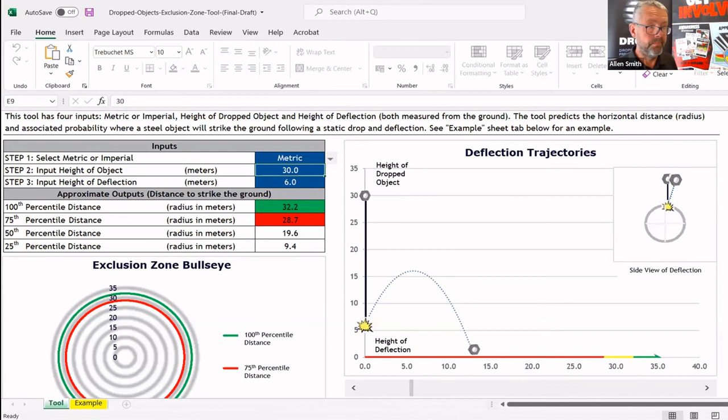And then start to appreciate that all of these other resources, particularly around human factors, particularly around your activity-specific variations on the drops themes, make sure we're referring to those. There are a broad range of industry best practices. Take the time to explore them all. Many other industries besides, they're all willing to share.

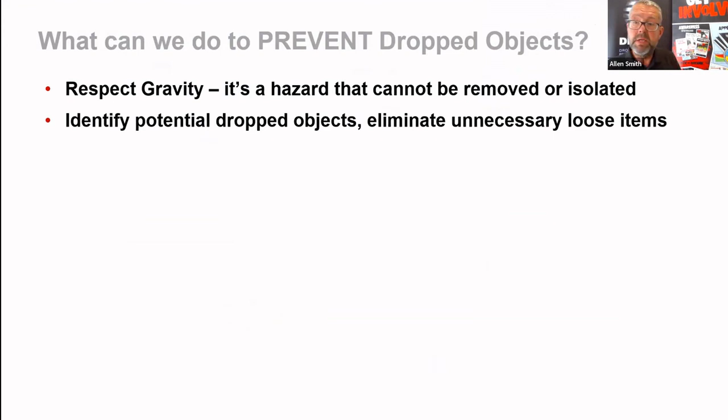So what do we do to prevent dropped objects? Again, some common themes here. Let's respect gravity. Respect all hazards, but respect gravity as being something just that slightly bit different. We can eliminate what we don't need, but take the time out to discuss these task steps. Remember that gravity is a key part of lifting, but it's also a hazard at the worksite.

OEM, original equipment manufacturer recommendations for fastenings and fittings and applications, that is something that we need to focus on. Ultimately, our equipment has been designed for purpose. Make sure we are using it correctly, it's properly installed, and it's maintained and inspected throughout every step of the task.

And if we understand our fastenings, we understand our controls, we can question the robustness of them. We can start to ask questions ourselves. Is this a suitable way to lift? Is this a suitable method of securement? Have we had an opportunity to take a step back and review the DROPS Reliable Securing?

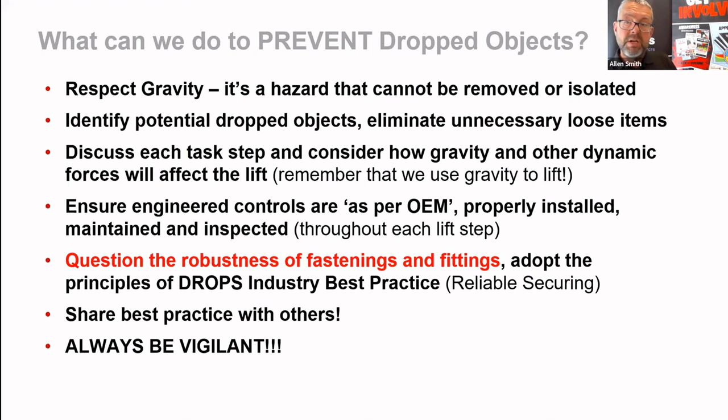Sharing best practice with others is always a good thing to do, and remain vigilant throughout, because in a lot of cases, perhaps we don't know when the next dropped object is going to occur. We can have all the great controls in place. So if we get involved and share best practice, I believe that we can make a difference.

So I've kind of hammered away through that. Hopefully I've nailed that for you, Stuart, but I'm open for any questions. Please feel free to explore these resources and share them and adapt them to suit. Thank you very much.